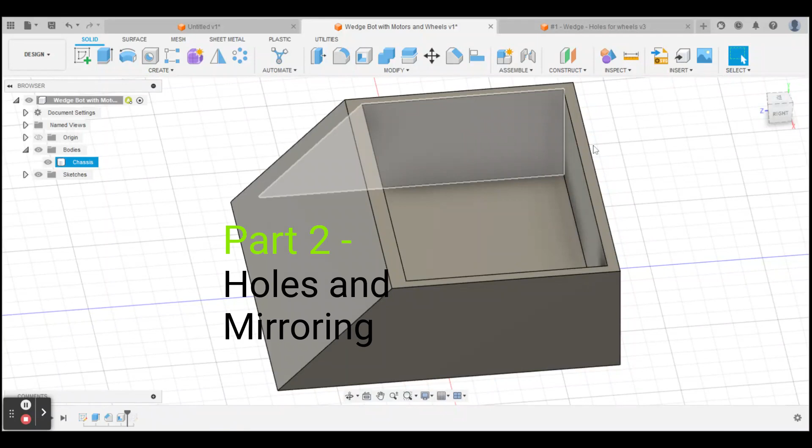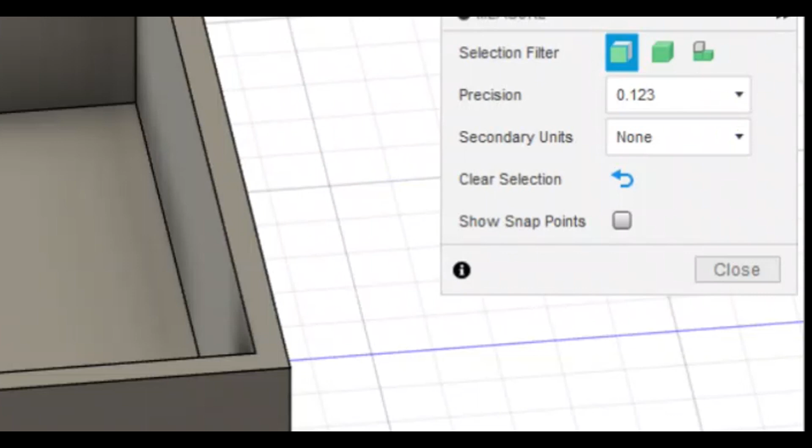So now that you have your wedge bot with your wall that's 5 millimeters thick, an easy way to measure if you have the right thickness is to hit I on your keyboard, which is for inspect. If I hit measure, I want to measure the distance from this line to this line, and you'll see that it says 5 millimeters. So I got the right thickness.

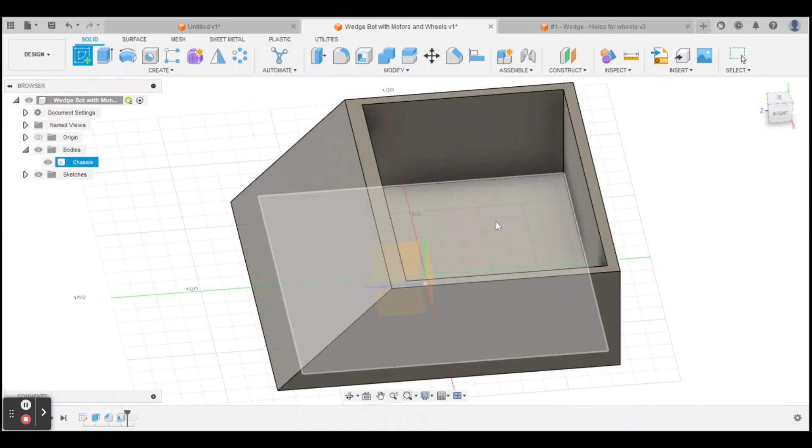Now what I want to do is create a sketch, and it's asking what plane do I want to draw it on. No, now I want to draw on the actual bot, on the inside face. So I'm going to click on the top view of my view cube, click on this square. Now this is the front of my bot, that's the slanted wedge.

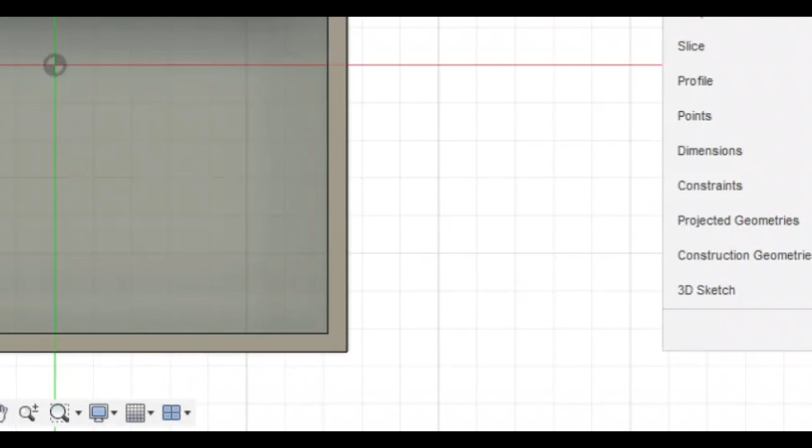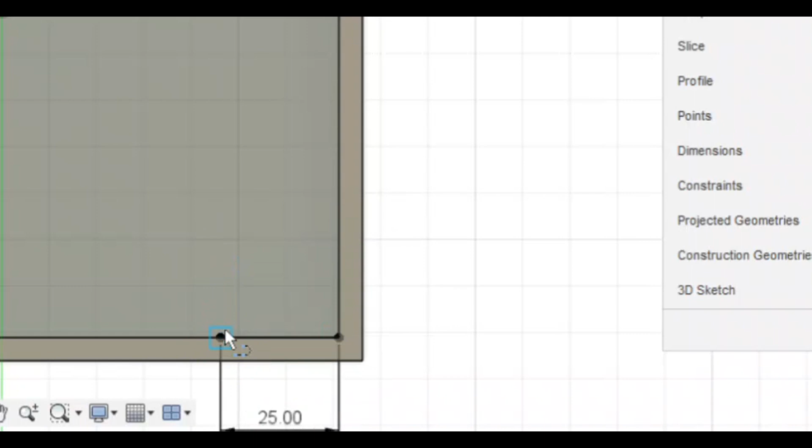I'm going to draw a sketch from this bottom corner to make my wheel mount holes. I'm going to do line, and start here in the bottom corner. See how it kind of locked in with the square? Boom, now it's locked. I'm going to do 25 millimeters on this line right here and go straight this way. Then another line out this way, I'll click here again and make this 32.

Make this 32. Now I have that sketch there. I have one hole that's 25 millimeters from the edge and 32 millimeters from the back.

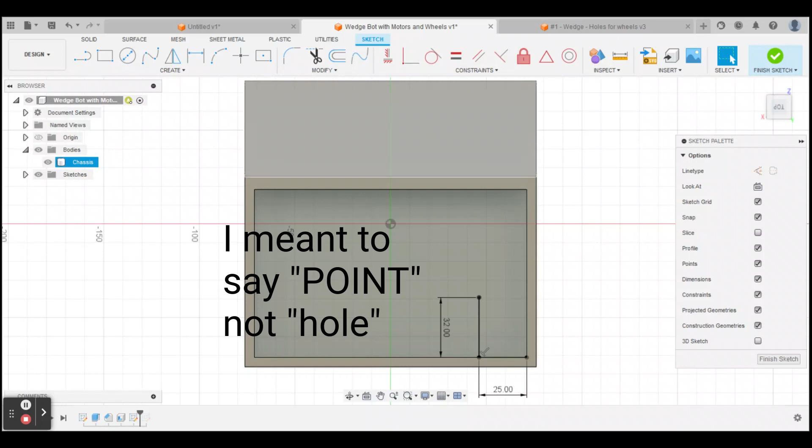Now I want to make another point for motor mounts, and that distance is, pay attention, 26.941. So I'm going to hit line again, or L.

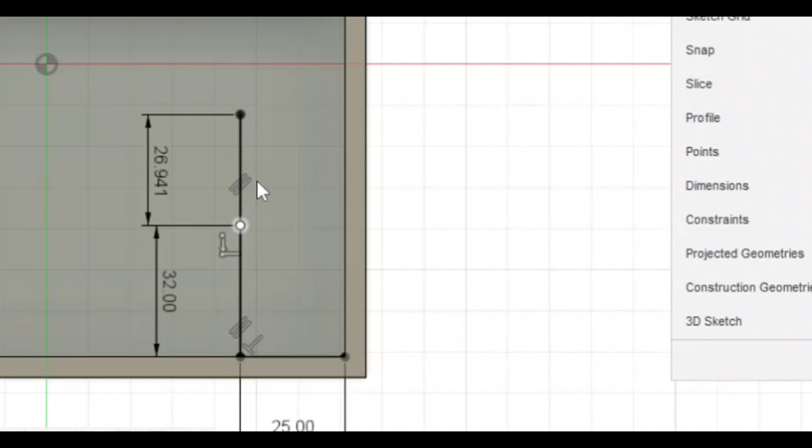Same thing, I'm going to click on this first point and move this straight up 26.941. I just hit enter, so now I got a dot here and a dot here. I'm going to hit finish sketch.

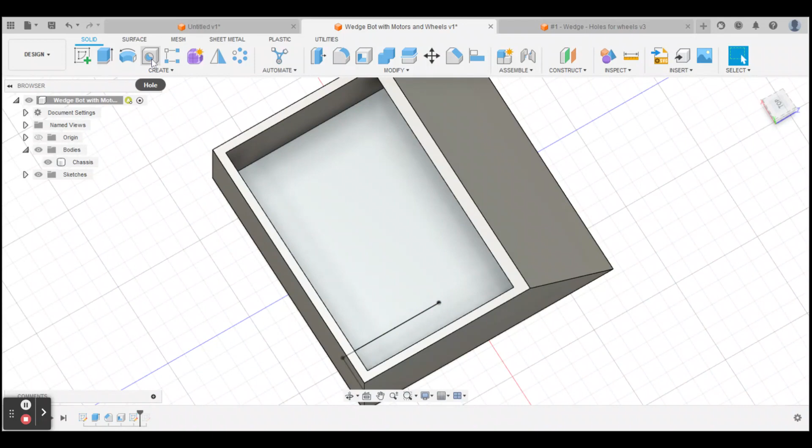Okay, so right now I have a hole here and a hole here. These are the only two holes I care about right now. So let's make a hole. The easiest way is to click on this hole button up here, and click on one dot there, but you see how giant the hole is? That's because it's too big, look where my mouse is.

We gotta see this, this is the width of the hole, they have it at 40 millimeters. That's way too big, we're gonna make this like 4 millimeters wide. And you see how this is at a point? We're gonna make this so it's not a point hole, we're gonna make it flat. Drill point, flat, so now it's flat.

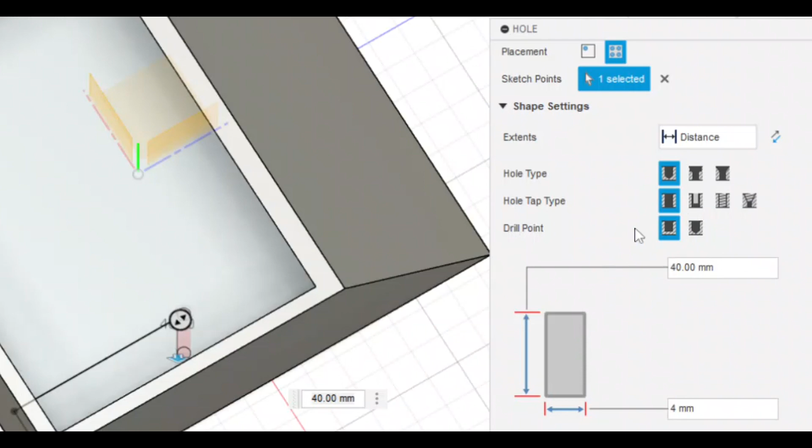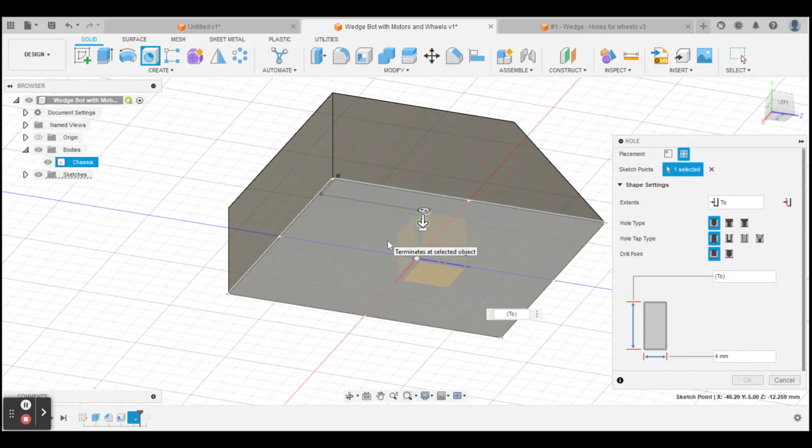Now it's asking how deep do I want to make this hole? You see how it goes way below the bot, that's too much. So I'm going to click on distance, click on To. Then I'm going to go down to the bottom and say where do you want this hole to end. I want the hole to go through to the bottom of the bot. So if I click there, now if you zoom in, the hole goes to the bottom of the bot.

All right, I am going to hit OK.

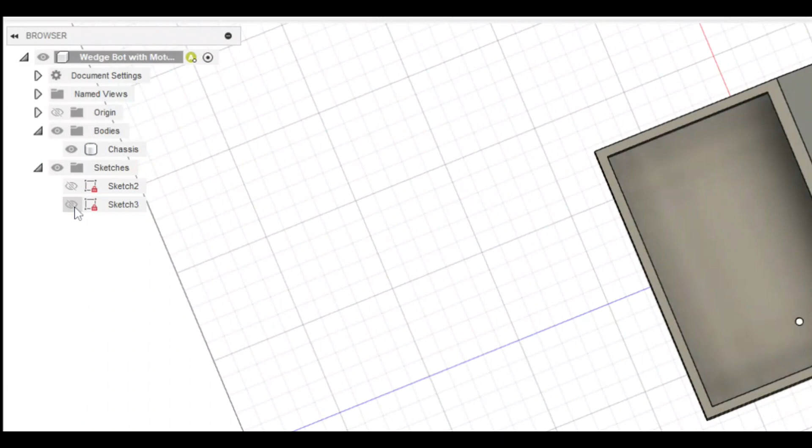But oh man, I forgot to make the second hole. See these sketches right here, see this eyeball that says sketches? I want to open this, and open my most recent sketch. You see how the line pops up over here? Watch, see the eyeball, that means you could see it.

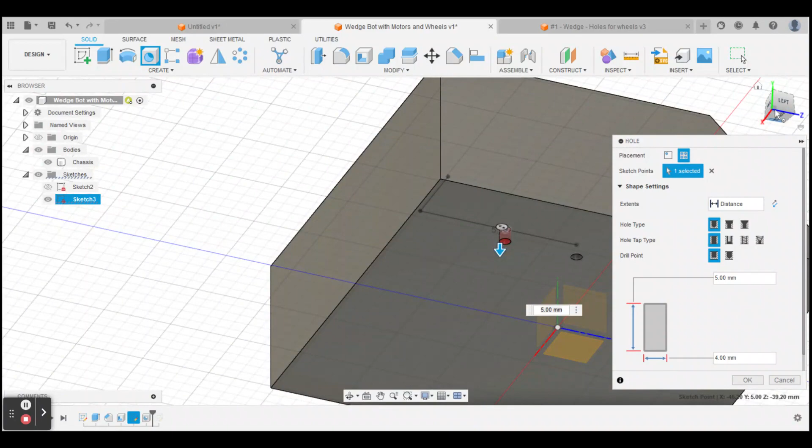I'm going to hit hole again, and find this hole. Remember I made this hole over here? I'm going to click on that, and it's really the same thing, 5 millimeters deep, 4 millimeters wide. And I'm just going to hit OK.

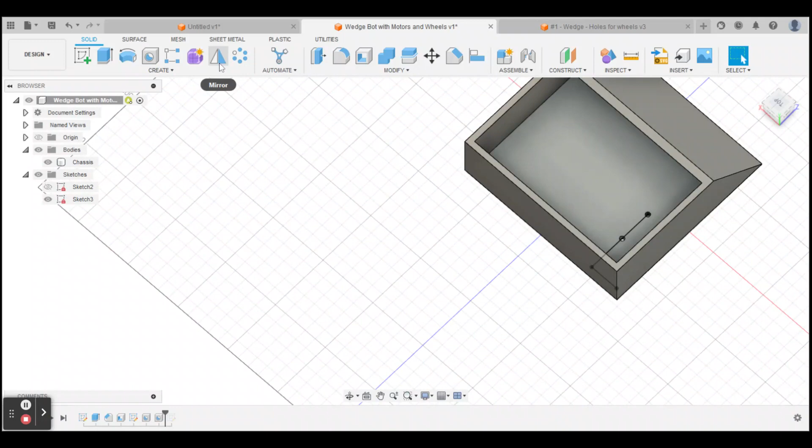Now you made holes. Awesome. Now let's mirror that. So what the heck is a mirror? That means you don't have to do the same thing twice on the other side, it'll do it automatically. So watch this.

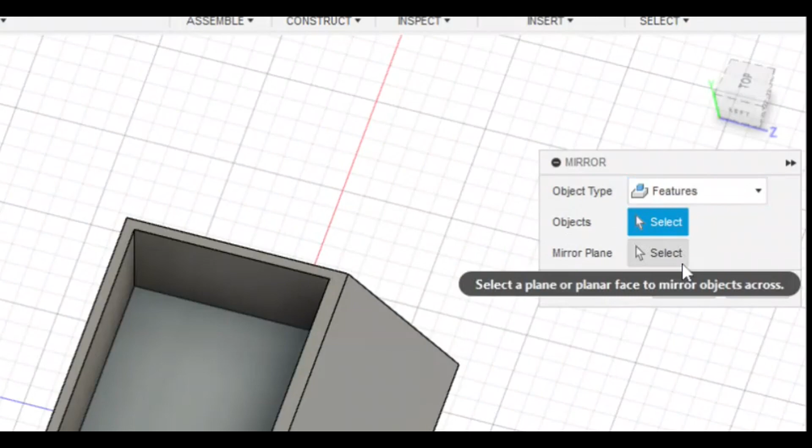We're going to click on this thing that says mirror, it's like this triangle. It says do I want to mirror the object, the body? No. Do I want to make a copy of the whole body? No, I want to make a copy of a feature of something I did, so it says select the features. Down here is my timeline, everything I've done so far. I want to mirror this hole and this hole.

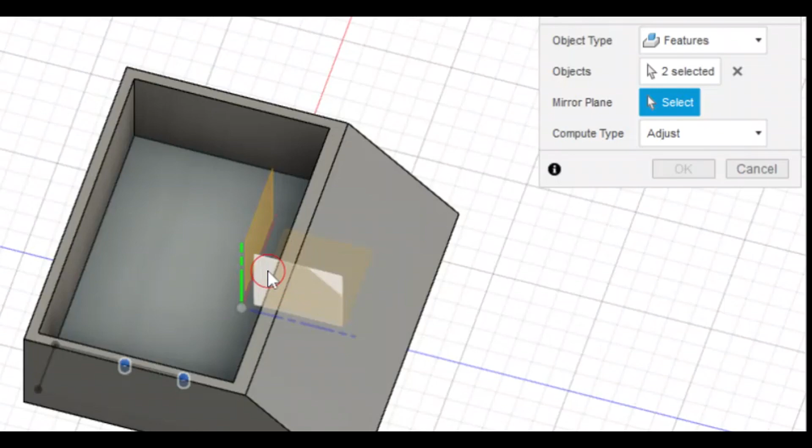And then I have to choose a plane. I'm going to click on mirror, on what plane do I want to mirror the holes? If I click here, the holes will be over here. I want to click right on this side, and now my holes are going to be over there. And I hit OK, and now I have 2 holes.

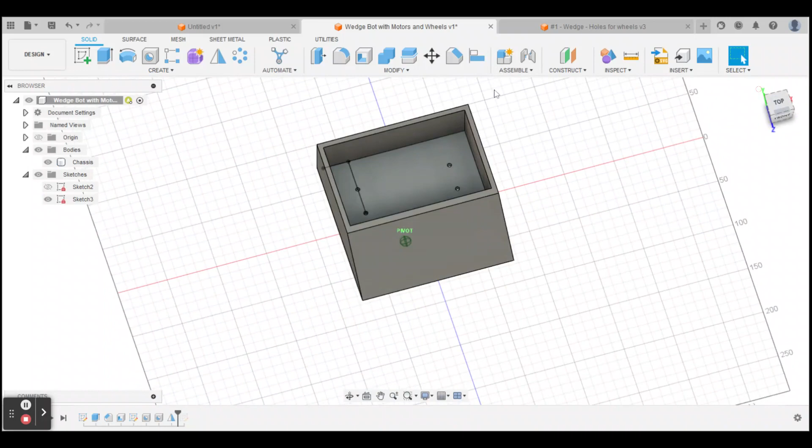So that's the mirroring function. That's the reason why we created the bot in the center of this graph paper, because it's going to do it on the opposite side of this blue line. Okay, awesome job, and we are done with part 2.